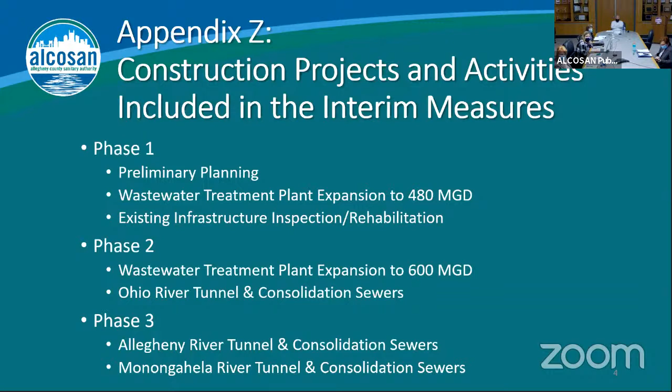So here's just a quick screenshot of two of the bullets in Appendix Z that will allow you to understand the preliminary planning process. It was dictated to us that ALCOSAN had to procure a preliminary planner by the end of August 2017, and that team had to prepare and submit the basis of design report by October 1st, 2020.

Another paragraph that I think is important has these dates associated with the ORT, that's the Ohio River Tunnel. Then those are the two stream crossings - the Chartiers and the Sawmill Run tunnel segments - just those stream crossings that you'll see on the maps. That's all been defined in Appendix Z, and these dates are something we have to adhere to.

So the water quality management, that's what WQM stands for - the Water Quality Management Permit Application due by January 1st, 2022 - means that we have to move into final design of that cluster of packages next year.

Are the segments tunnelized or open cut? The Chartiers and Sawmill - those are tunnelized. Yes.

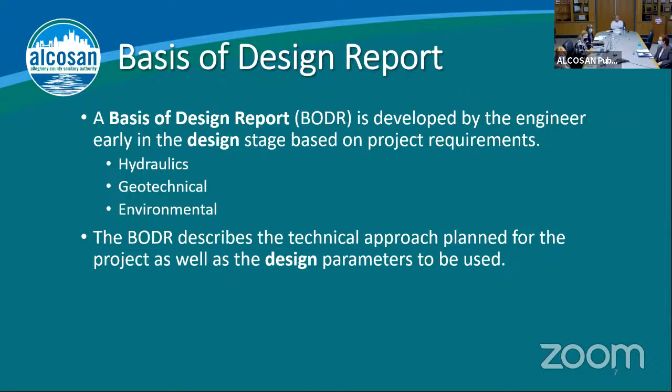And we did it. We submitted this giant document to the agencies on October 1st. Michelle has confirmed with the agencies that they received it, because transferring documents that size, even without COVID, isn't easy. So we did meet that obligation under the consent decree, and it was a significant milestone.

One of the things the basis of design report has indicated is this estimated combined sewer overflow reduction, and this is why we're here. Phase 1 is the wastewater treatment plant expansion up to 480, estimated to reduce 2.8 billion gallons of CSO. Phase 2 expands the treatment plant up to 600 MGD, including the ORT, the Ohio River Tunnel segment, which will reduce another 1.1 billion. The ART, the Allegheny River Tunnel, is estimated to reduce 2.2 billion gallons of CSO. The MON, our last segment, is 1.1. So that's an estimated 7.2 billion gallons of CSO reduction in a typical year.

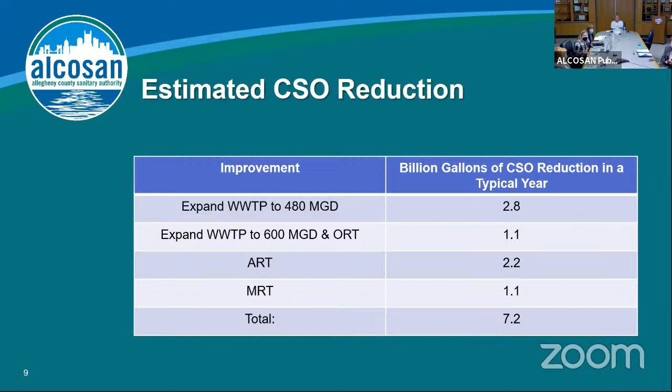So it's good not to lose sight of the forcing function behind why we're doing all this. This is the slide I showed you last month, and this is what I'm going to use as the basis to go into a little more detail for you.

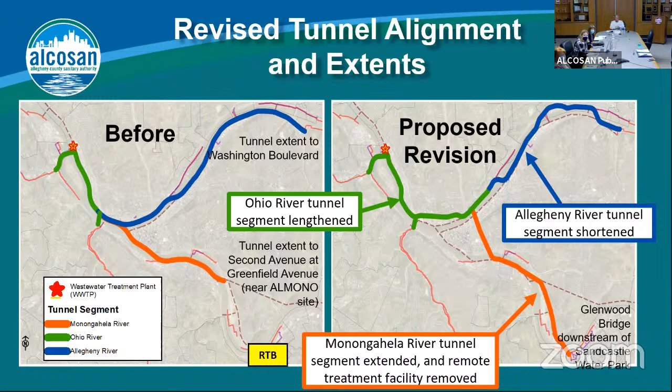Does the 7.2 billion reduction bring us into compliance with the EPA requirements? No. After this interim phase, there's the post-construction monitoring. Whenever we can demonstrate that the water quality monitoring meets requirements, that will determine compliance.

So after 2036 it's anticipated that all projects under the modified consent decree will be done, and that'll be our commitment under the final measures to take that last chunk and get it down.

This is the modified consent decree, negotiated based on affordability. Remember, to take it originally down to zero off the bat was $3.6 billion in 2010 dollars, which was deemed unaffordable by our ratepayers. So the forcing function of the negotiation was: what's the affordability threshold of our customer base? That turned out to be 2 billion. So the negotiation was, how can we spend our 2 billion to get the most for the bucks? That's what the modified CD was.

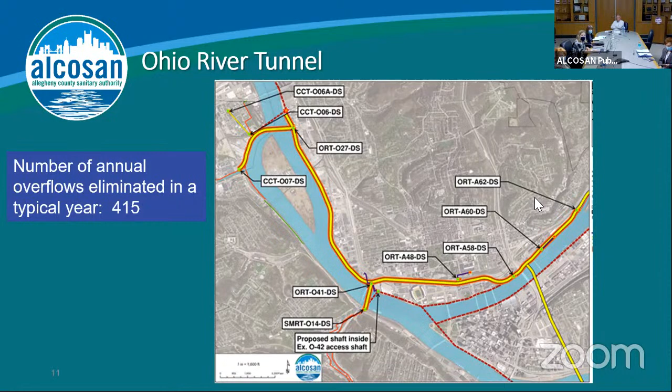Okay, now we're going to go a little deeper into the Allegheny, which, if you remember from my previous slide, will eliminate 2.2 billion gallons of CSO. The Allegheny is a wet place, and we're eliminating over 900 overflows in a typical year. I know it seems like we're crossing the river a lot, but we're crossing because we're picking up really large overflows. A42, all the way in the northern end, is actually our largest overflow, and A22 is another one of our top 5. Yeah, so the ART is a very wet place that has a lot of CSO flow.

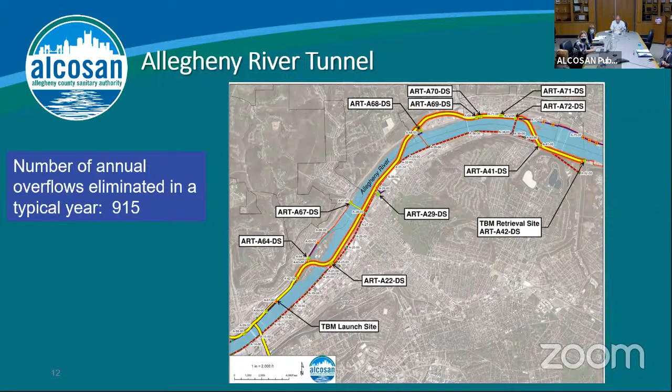And then our last segment here is the MON. The MON would pick up sort of where the ORT finished and the ART started.

Now, an interesting part of the Mon River Tunnel, it used to stop at M29, and we're asking to extend it all the way down to Sandcastle. So the plan right now would be to launch this Mon River Tunnel from the Sandcastle site, around Sandcastle, and then we would launch towards the Allegheny River.

And in the wet weather plan, we had a long consolidation sewer planned through the south side. But what we realized was we could just put individual drops into the tunnel and really limit the disturbance to those communities through the south side and Southside Park.

So that was one of those advanced engineering mechanisms. Through modeling, we were able to say we could really limit the surface disruptions through the south side by making these individual drops into the tunnel.

And then we will not come up through this entire segment. So once it launches in Sandcastle, you will not see that tunnel boring machine again until it comes out on the northern side of the Allegheny River. And there will not be any surface disruptions through this crossover through Uptown.

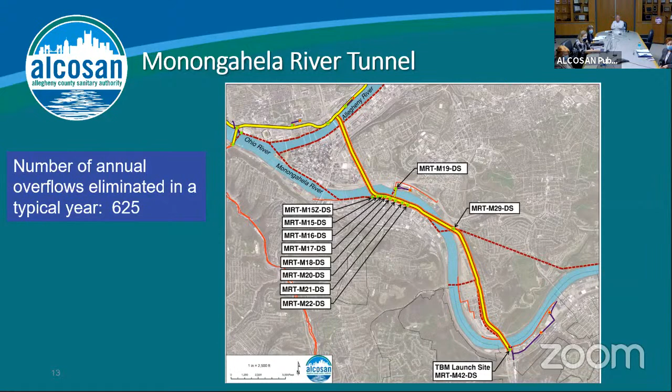I can't ignore the fact that we will need property. Work of this nature cannot be accomplished without acquiring some property. Specifically for our tunnel launch and retrieval sites, we have established protocol, and we've hired property consultants to help us through this process, as this is not something that we do every day.

But most of the property needs that we will see are subsurface easements, those easements that are greater than 150 feet deep. We would contact the property owners, but they'll never know we're there. But we will have property needs, and I don't want to ignore that or not at least mention it.

And then schedule-wise, like I said, we will be starting the ORT final design next year, getting into construction towards the end of 2023. And then we'll be in construction for a little bit on the ORT before we start the ART design, and then the MON will follow.

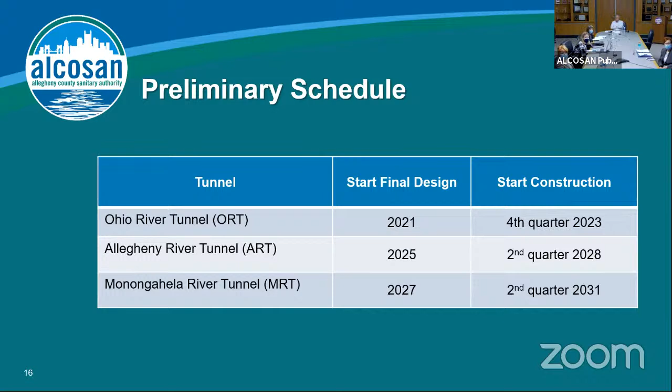So are there chances for people to input on the final design of the tunnel? Definitely. That's still open. We haven't even hired the final design consultant teams yet. So in those final design consultant teams, there will be public meetings and coordination with the stakeholder communities. That hasn't even started yet.

So the Ohio River Tunnel will be functional prior to the other two tunnels. Yes. So that'll give ALCOSAN the opportunity to have the experience of tunnel construction and impact the plant as you plan the other two tunnels. That's correct.

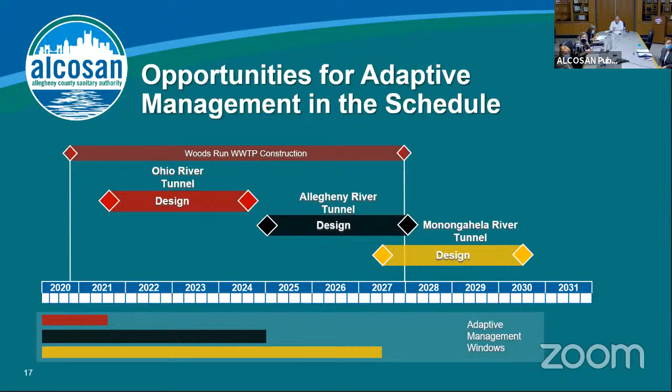And Darla, after some consideration, you're going to be driving that tunnel when it goes 300 feet down. On behalf of the committee, we're putting you in that machine.

Well Tim, I was going to mention when we took a trip to Washington, D.C. and met with that water and sewer group, their tunnel tweeted its locations. So as DC was tunneling down in residential areas, the tunnel was tweeting. I have no idea how that worked, but I thought it was fascinating.

One thing, do you know whether you're going to be trespassing on coal tunnel, residual coal tunnel areas? I know when we were looking at our geothermal system installation, we hit an unmapped, unnoted coal mine at 95 feet. So I'm wondering if you have good survey information about the possible intersection with former coal mines when you're down at that depth in these areas.

That's a very good question. And that's why we did over 70 borings in the advanced planning stage, and there will be more borings to come. We're trying to stay in solid rock.

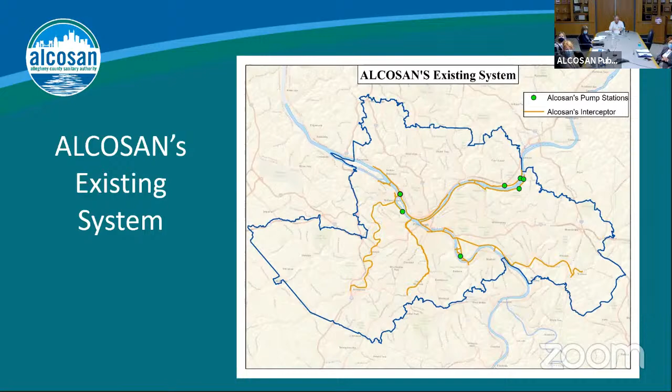So that SRIC committee developed what should be considered for regionalization, because we looked at a wide array of sewers to transfer to ALCOSAN. What we ended up with is multi-municipal sewers - sewers that collect more than one municipality's sewage flow - and a sewer that was 10 inches or larger in diameter. That equated to 265 miles of sewer to transfer over to ALCOSAN.

Along those 265 miles of sewer, there were 8 existing facilities: 4 equalization tanks in Girty's Run and Penn Hills, and 4 pump stations scattered throughout the service area along those multi-municipal trunk sewers. There were also 6,200 manholes and 77 diversion structures located along those multi-municipal sewers that would transfer to ALCOSAN.

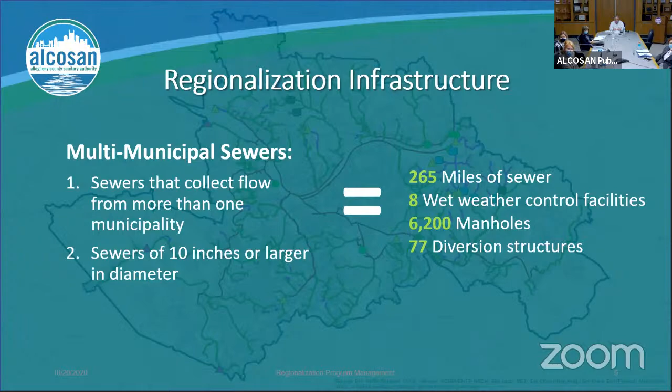This is depicting what that would look like. Again, the ALCOSAN facilities are shown by the gold lines, and infrastructure meeting the criteria of multi-municipal and 10 inches in diameter or greater are shown by the green lines. The pump stations that would become regionalized facilities are shown by the fuchsia triangles, and the aqua cylindrical shape identifies the existing equalization tanks, shown along that 265 plus miles of sewer.

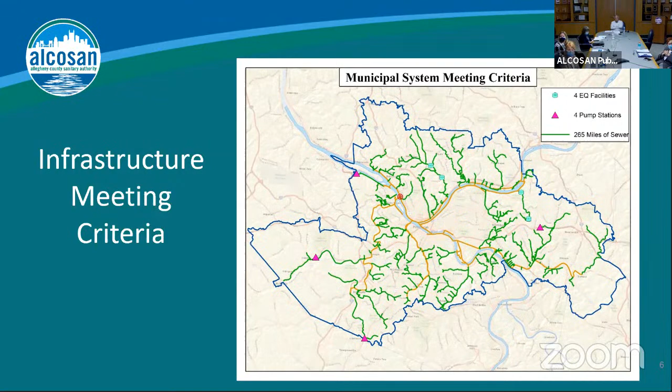Why regionalize? It has been identified that there could be an improvement in the management of costs, maintenance and improvements, since maintaining a sewer system these days is not going to get easier - it's just getting more complicated. So it has been determined that there would be an economy of scale achieved by that, and that the region would benefit from it.

It also promotes collaboration between ALCOSAN and its customer municipalities. There are streams in the sewer system. There is I&I reduction that needs to occur. There's green infrastructure, and there's also parallel or upgraded sewers that need to be constructed to contribute to the wet weather plan.

There's a disparity of income in the region. Back in 2010, median household incomes ran between 18,000 at the low end and 220,000 at the higher end. One of the things that seems to happen is that the lower end stays the same, but the higher end seems to increase. So the divide is increasing.

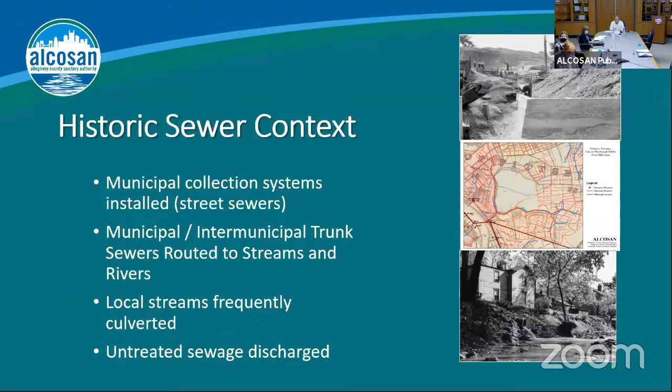Regionalization evaluation was done to respond to requests, to prepare for the future, to determine the pros and cons, identify the obstacles, and explore alternatives.

We were looking at a huge infrastructure program to the magnitude of $3.6 billion. 560 million of that was to be spent on municipal sewer improvements from their municipal feasibility studies. So it was all these things that required us to take a look at options for expanding ALCOSAN's role.

We did look at what were the regulatory benefits, what were the pros and cons of each one of these: environmental, organization, legal, was there going to be stakeholder acceptance? How would operation, maintenance, and management occur? And then again, the financial magnitude of it. Was there a cost savings to be experienced by doing this? It was a joint effort. There were multiple people involved, and they recommended strategies for implementation and action items.

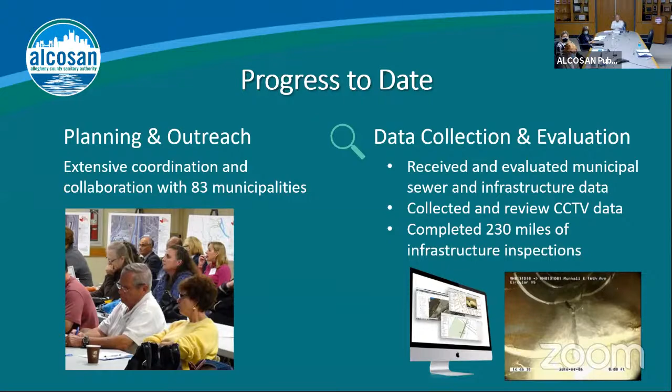In this process, defects were identified. Some of them were extreme. We identified them as significant or critical, and those are ones that municipalities are required to address prior to transfer. Some of them were health and safety issues, and the municipality was notified immediately if that situation existed.

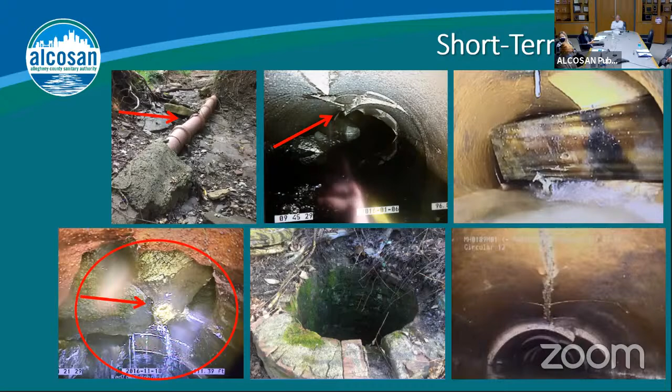Those other sewers are required to be repaired by the municipality, and that's part of what is in their defect reports, which also include the transfer agreements. These are more long-term defects that would be repaired by ALCOSAN as they become part of our capital improvements program.

The evaluations that would be done include how much flow the pipe carries, how much that would impact bypass pumping, whether it would be more expensive to fix the repair as part of an emergency, or if there's a reason to get in there and do it before that becomes an emergency. So this is where we're at.

These long-term defects are 10-fold the short-term defects in terms of cost. I could share some of the estimates with you, but they didn't address access very well, or the municipality may differ in what they'd like to do in terms of the repair. But the approach will still always be that short-term repairs are one-tenth the cost of long-term defect repairs going forward.

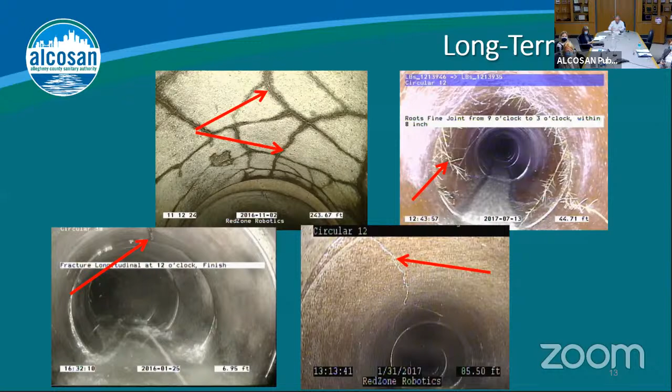What also would be included as part of the regionalization are the wet weather collection system improvements. So there are 140 overflows that will still discharge, and parallel or upgraded sewers would need to be constructed down to the ALCOSAN proposed regionalized sewer system.

We are currently working with these municipalities to reduce flows, so you would hopefully reduce the wet weather needs. There's an opportunity to actually take some significant I&I out of the sewer system in this sewer shed. We're doing that in combination with the CCTV tapes gathered through the regionalization process, and also the GROW program, to help offset the cost to the municipalities. We're moving it from a structural repair to an I&I reduction improvement.